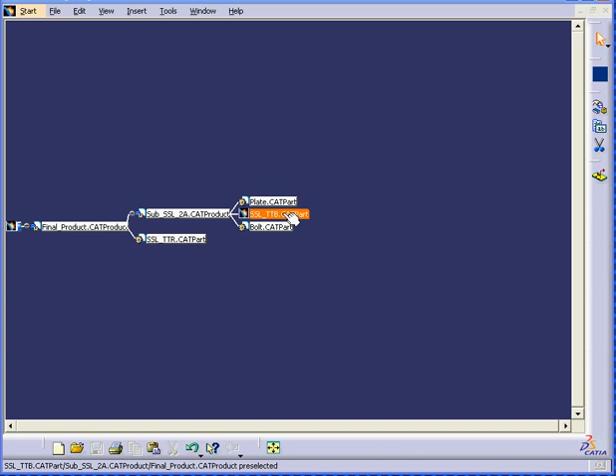We seem to be missing a part. Let's click the desk to go find it. Right-click on this part which appears to be missing. Select Find. And here's our part. Open it. Now let's close the desk. And here we have our components. Next, we're going to use the compass to position the components.

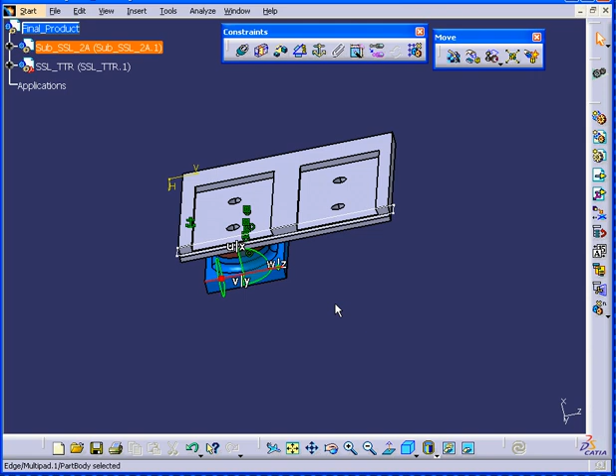Now we need two of these components for this assembly. Let's right-click and copy. Right-click and paste at the assembly level. You'll notice that when I copy, I click at the component level, but when I paste, it's at the assembly level. Now on the component I just highlighted, let's move it. Oops, it's actually not highlighted.

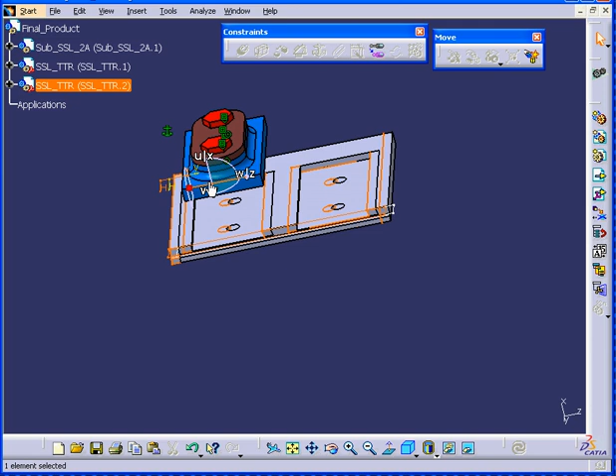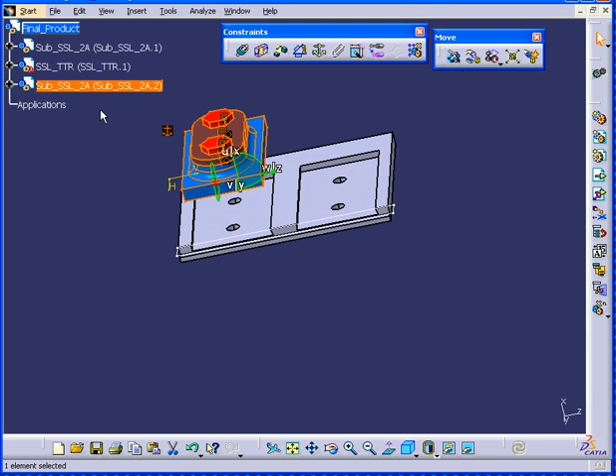Okay, I see what's happened. I've copied the wrong component. All right, let's fix this. Right-click. Let's go back to the assembly level and delete the component. Now let's go get the right one. Right-click, copy, and back to the assembly level where we paste it. Okay, now we've got the right component, and once it's selected, we can move it. Okay.

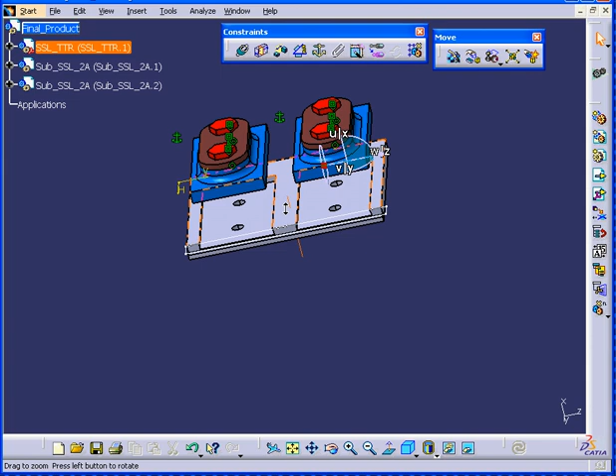Now let's rearrange our tree. Move it down, apply, click OK. Now let's use Fix Component and fix this component. We do need to hide these bolts.

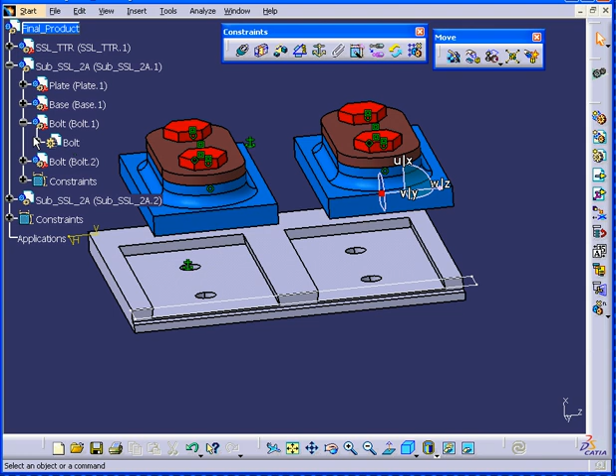So let's right-click after we expand the specification tree. Selecting Hide/Show, one bolt is moved to No Show. But we do need all four to disappear, so let's bring this back. And let's go deeper to the part body level. Right-click, Hide/Show, and now as you can see, all four bolts are hidden.

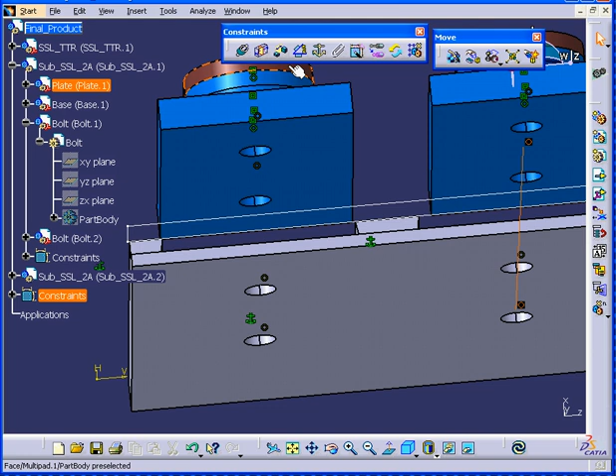All right, we're going to constrain our component now. First is the coincidence constraint, to constrain this hole to this hole. Second, this hole to this hole. Third, this hole to this hole. And lastly, this hole to this hole. Next, we will apply the contact constraint, this face to this face. This face to this face. Let's hit Update. As you can see, our components are constrained.

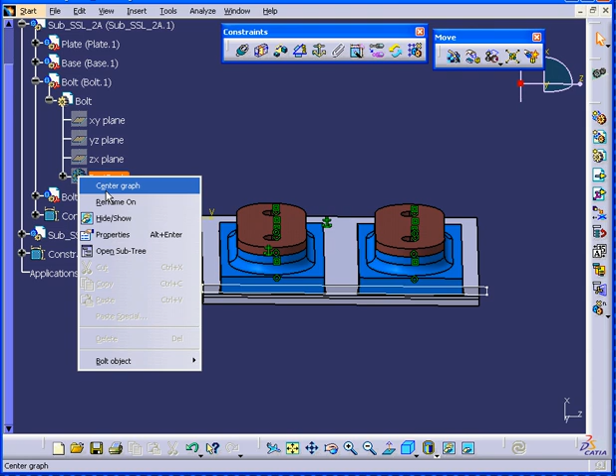All right, let's bring the bolts back. Right-click, toggle back to Show. OK. We seem to have a problem here. It looks like this part doesn't match the base exactly. Well, let's replace this component.

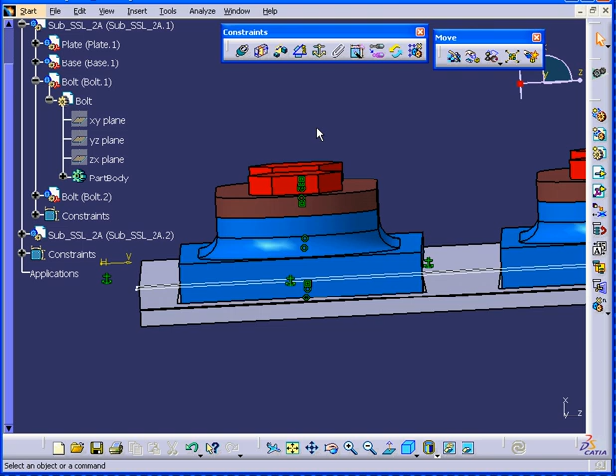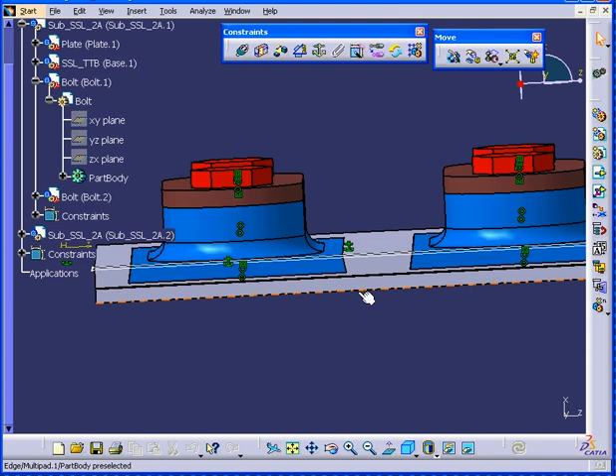I can use the Replace Component function from the Product Structure toolbar. Or I can right-click on the component, select Components, select Replace Components. Now we navigate to find the right component and we open it. CATIA prompts us, asking us if we want to replace all instances of the selected element. We will choose Yes and click OK. Now, as you can see, it fits perfectly with the base.

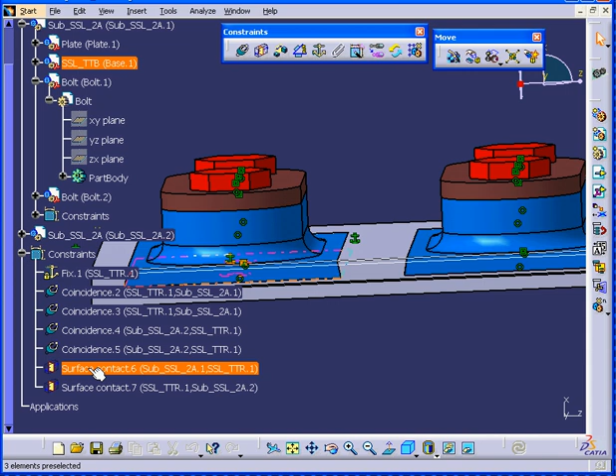Sometimes when you replace components, some constraints will get broken. If that happens, you will see a yellow exclamation mark in the specification tree next to the component. When this happens, you have two choices. You can delete the constraint and create another, or you can double-click on the constraint and select More. And right here, you will see the word Disconnected. You'll need to click to reconnect and then click OK.

Next, I'd like to show you, let's collapse and expand the plate component. Okay. You'll see I'm in the Part Design workbench. I double-click on the plate at the part level. All right, let's add some chamfer to this part. Click on the edge, enter a value of 1/8 of an inch, hit Tab, and preview. When I click OK, you will see that the changes will be applied to this plate as well.

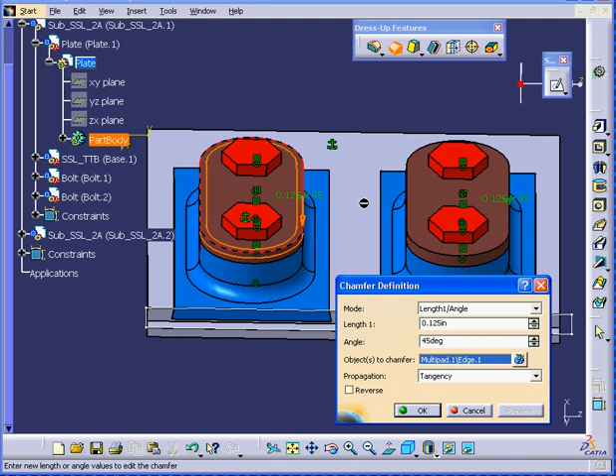As you can see, basically you can make adjustments at the part level anytime. After making your adjustments, you may go back to the assembly level and keep assembling your components. And this concludes our third tutorial on assembly.